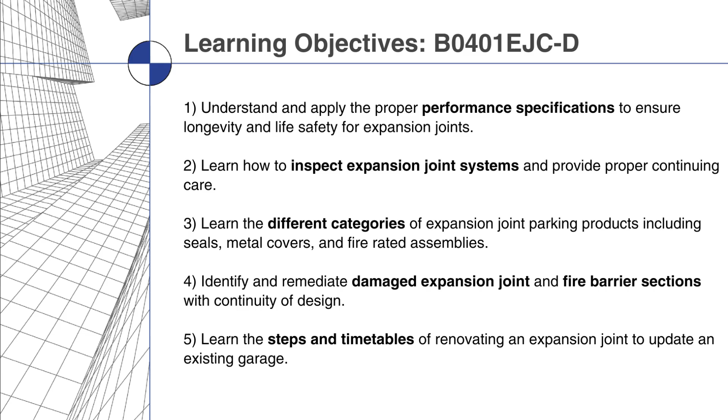This course explains how to understand and apply performance specifications to ensure longevity and life safety. You'll learn how to inspect expansion joint systems, provide continuing care, explore categories of expansion joint parking products, and how to identify and remediate damaged sections while maintaining continuity of design. The course also covers key steps and timetables for renovating expansion joints in existing garages.

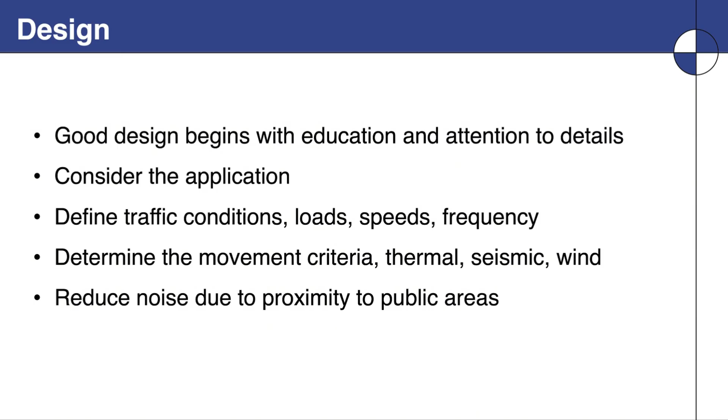Good design begins with education and attention to details. Consider the application, define traffic conditions, loads, speeds, frequency, determine the movement criteria - thermal, seismic, wind - what's going to be affecting the movement of your structure, and reduce noise due to the proximity to public areas like maybe an adjacent apartment building, or maybe there's a roadway nearby where you're doing your design work.

So what should a good expansion joint cover system accomplish in a parking garage? Well, the primary reason they're there is to handle specified movement of the structure. But we also have a lot of things to consider in terms of performance, like load capacity, water integrity, fire protection for any adjacent structures and the structure itself, sound reduction, and smooth traffic crossing.

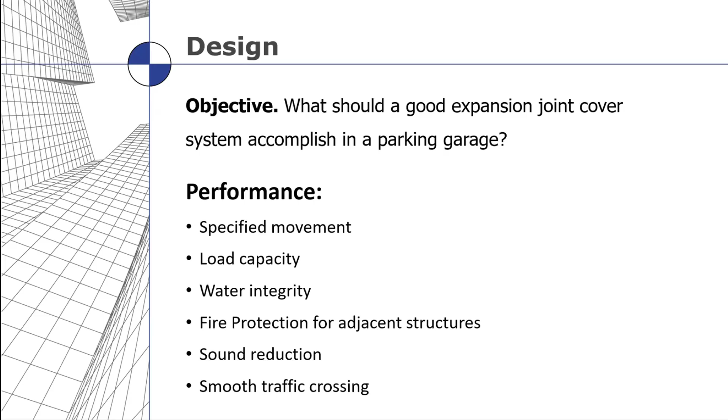One of the ways we take care of this is we consider all these environmental factors. When you're pouring concrete for a parking garage, which is a large construction segment highly affected by temperature change and curing of concrete, it's best to consult with a manufacturing firm and an engineering firm to make sure that the movement related to the structure is also in line with the product chosen that has the right kind of movement for that structure. So you want to make sure the two align.

I'll give you an example of a structure where you really need to pay attention to environmental considerations, and that is this diagram of a Texas wrap. The premise is that there's a parking garage that's basically freestanding, but built all around the perimeter is a series of construction projects related to either commercial or residential, like multifamily or something like that. And they're all connected together.

That red rectangle you see there is the expansion joint cover that happens between the parking garage and the structure. So we want to pay close attention to how we treat that - keep it waterproof, allow it to move, keep the fire where it starts out and don't let it move around and through the structure. We want to make sure we pay attention to all those kinds of things, in addition to all of the harsh elements like rain and sun and all that sort of thing that we contend with in these types of applications.

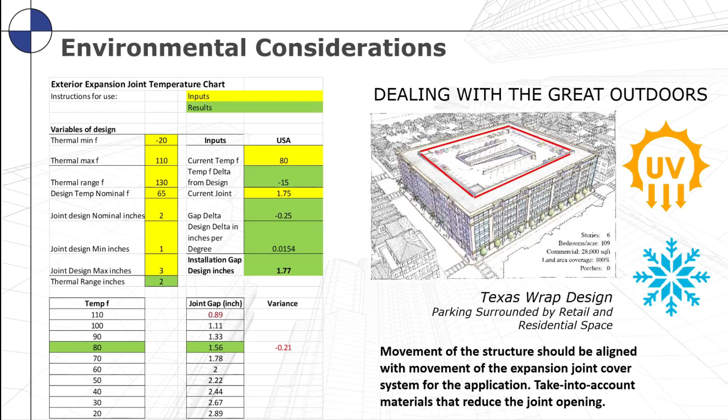Environmental concerns: concrete in winter versus summer. Concrete expands in the summer, which makes the expansion joint gap get smaller, and concrete shrinks in the winter, which makes the joint gap get larger. So the timing of the concrete pour should be coordinated with the joint cover material being applied.

Elastomeric systems allow for a wider percentage of movement due to the smaller joint size. So if you have a small expansion joint opening, the amount of expansion and contraction of concrete has a greater effect, but elastomeric seals are very good about taking up these variables in the width of the joint due to temperature changes.

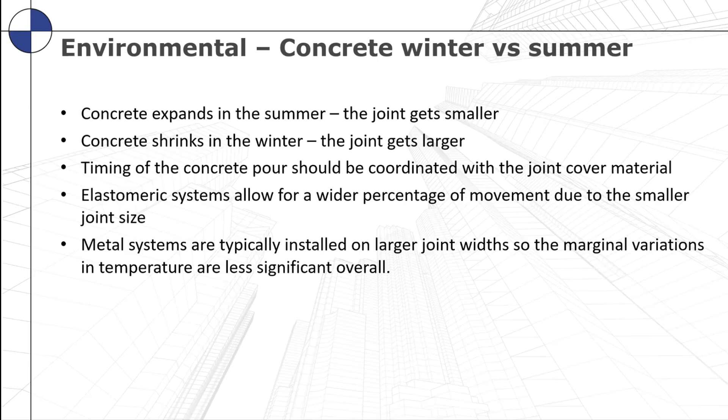Metal systems are typically used in larger expansion joint gaps. Even though there is movement happening in concrete as it grows and shrinks in hot and cold conditions, in larger joint applications that's minimized by the width of the joint being placed. So in both cases, you really have less to worry about than you think when it comes to concrete growth and shrinking due to thermal conditions. We've really taken most of that into account, whether you have an elastomeric system or a metal system in your garage.

For load capacities and those kinds of requirements, it's best practice to state what your load path is for the type of construction going on and what kind of equipment will be crossing through your garage. You may have an industrial complex with pallet jacks going in and out, so you have different types of pallet jack loading. Forklifts are common, class 2 and class 3. Scissor lifts for repair, changing lights, and fixing electrical equipment may also be going through there.

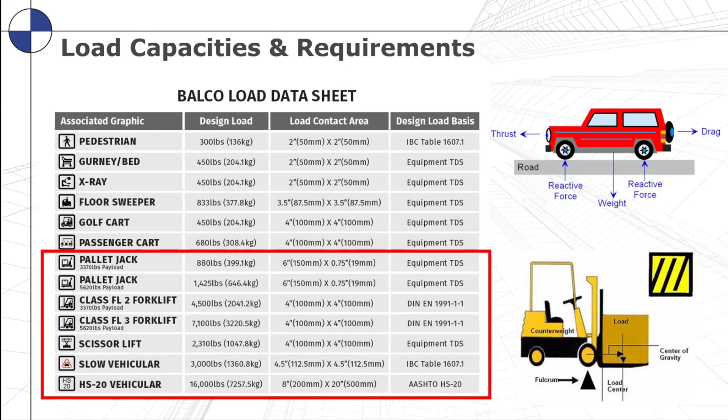Slow vehicular traffic in a parking garage is most common. An HS20 vehicular traffic might apply if, say, you have a parking garage with an entry lane coming through an airport, so there's higher speed traffic coming up to the garage that slows down once it gets into the garage. All of these may factor into the kinds of products you choose, but it's best to know the load area, the length and width of the area, and the amount of loading being applied so we can select proper products.

This particular project is the Jorge Chavez Airport in Lima, Peru. This is a 30-inch wide expansion joint with a 62-inch wide cover plate, so quite a large system. These can be pretty robust, and there are a lot of considerations for movement. This had a 100% maximum open movement and a 90% closed movement, and that's very important.

Why 100% and 90%? Well, the 90% is because there are elements of the construction and expansion joint cover system that go into the throat of the expansion joint gap, taking up some amount of space. So we need to make sure we coordinate. If you want 100% open and 100% closed, you may have to make the joint a little bigger than you thought to make room for things like fire barriers, water barriers, metal framing, and other components that might be inside the joint openings. You may have to upsize the width of the joint to make room for all those internal components.

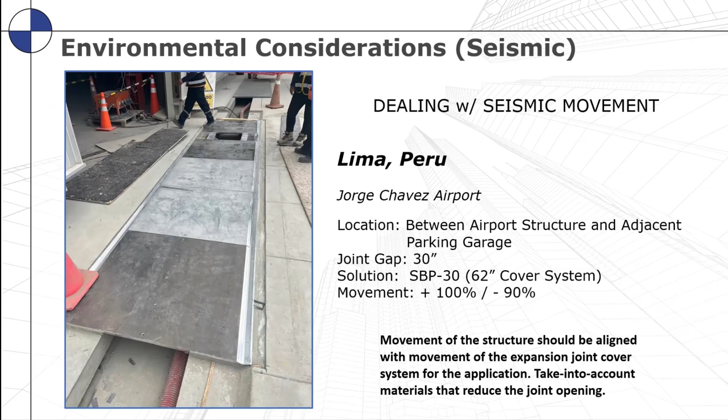Water management is extremely important. In elastomeric systems, they're generally controlled by the seals themselves installed in the structure. In larger systems with metal plates and metal expansion joint cover systems, generally speaking you have a moisture control system, usually a water barrier that could be made of different materials like EPDM or TPO or other flexible materials. But all of those change directions, they move horizontally and vertically, they change directions in the same plane, and you need good instructions on how to make sure all these remain watertight.

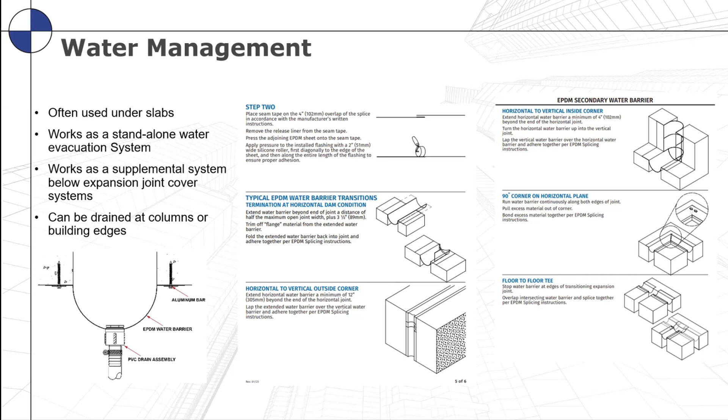You may also wish to have drains placed, so you can control where you want the water to go, instead of it just sloping through the garage. You might want to put a plumbing connection that drops between a column so it's hidden from public view, while controlling the water evacuation and sending it wherever you want, to drains in the basement, or out to planters outside the structure, or whatever mechanism you want to use to evacuate the water.

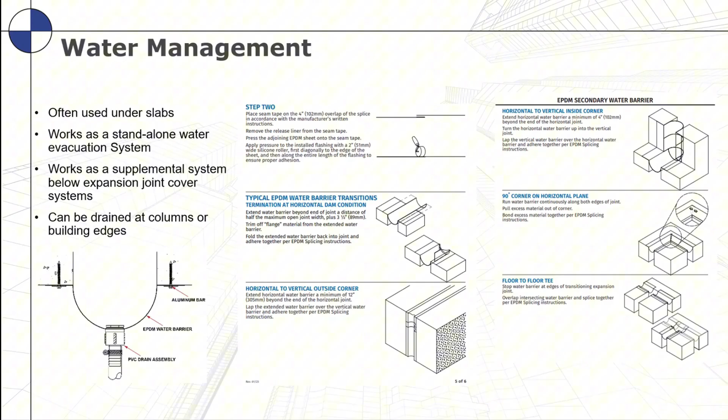Fire ratings: standalone parking garages are currently exempt from fire barrier requirements in the expansion joint application. That's a standalone garage. But other items like fire stop penetrations are now part of the code, and it is currently in code discussions to look at putting fire ratings into the expansion joint applications in garages.

But if a garage is connected to another structure, like a residential structure or a commercial structure, then you're going to have fire barrier requirements where those two meet, where the garage meets the commercial condition. So it's good to be up on the codes and the requirements for expansion joint fire rating.

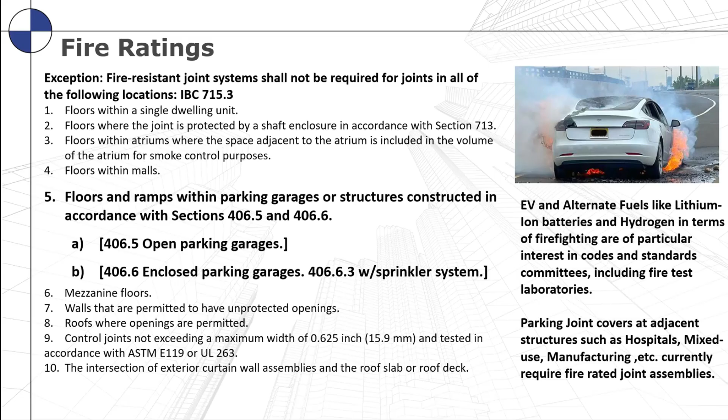One of the discussions taking place now is also EV and alternative fuel, like lithium ion batteries and hydrogen and things of that nature. Those burn differently - they have a faster burn and a hotter burn for a different period of time than most construction materials that have traditionally been placed in buildings. So these discussions are taking place that it may affect the fire rating of those kinds of areas in standalone parking structures, as well as structures that are connected to commercial properties.

When you're looking at fires and the casualties associated with that, generally speaking it's smoke that is the culprit causing the majority of fatalities. There's been a lot of studies done here - this one's done by John Hall Jr. of the NFPA, the National Fire Protection Association.

The short version is that smoke does travel with some speed - about 3 to 5 miles an hour, which is a walking pace to a brisk jogging pace for most people. That's okay if you're outside on a track or inside a gym on a treadmill, but it's not okay if you're with a crowd of people with sight visibility reduced because of the smoke and you're trying to egress folks through a confined area. Then that speed is not practical, and so you have people overcome with smoke.

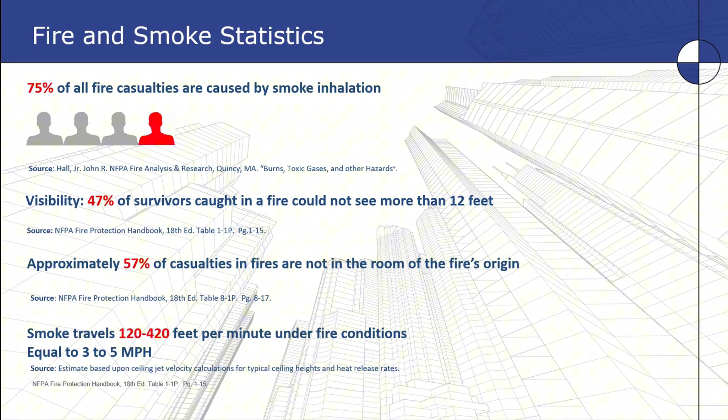So it's best to be able to keep the smoke travel contained in certain areas so that it doesn't spread throughout the structure. Another thing that we want to reduce is sound transfer.

So if you have a parking garage next to an apartment or something like that, no one wants to hear that clank clank when people are driving over a metal cover in the garage, and they hear that in their apartment. So sound dampening is important.

So we want to rely on sound dampening as a part of the structure itself, but it's best practice to make sure that we take care of that sound reduction in the expansion joint covers themselves on the parking garage. And so for that, we use different kinds of measures.

There are two measures that are most frequently used. In a parking garage, the most common is the OITC, which is the outdoor to indoor sound transfer - obviously from an outdoor garage or a drive lane to a building. The whole idea is to reduce the amount of decibels coming from the subject where the noise is to the pedestrians that are hearing this noise.

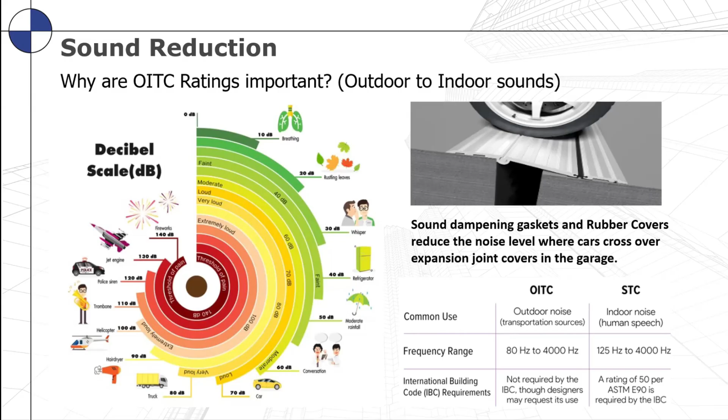And then there's another indoor to indoor noise measure that's not as applicable to parking garages, but it's a sound transmission class. The idea is you want to reduce it down to an acceptable level, so you want to get your ratings.

Let's use STC for an example. You want to be at a minimum of a 50 reduction, which means you would faintly hear sounds. A 60 would be like if there's a loud noise outside, you wouldn't hear it inside, like shouting or hammering. And a 70 reduction, which is extremely high, would mean basically no change from a high level of decibels outside to inside. Most of what we target is going to be in the 50 to 60 range for reduction.

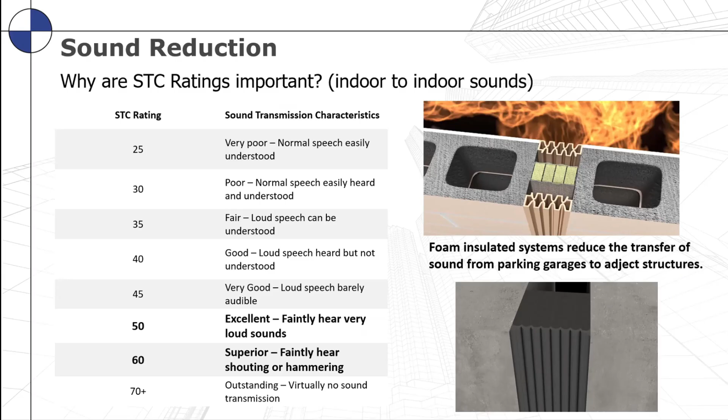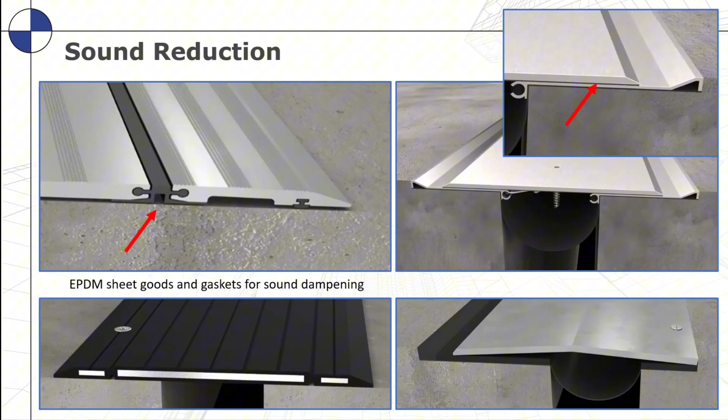You can place your metal cover on top of elastomeric materials like EPDM reinforced rubber, conveyor belt type materials, things of that nature, that you can fasten into place that absorb that sound. And all of these things, being rubber, are pliable, so they also allow for some vertical compression and motion as a result of loads being applied to the parking deck.

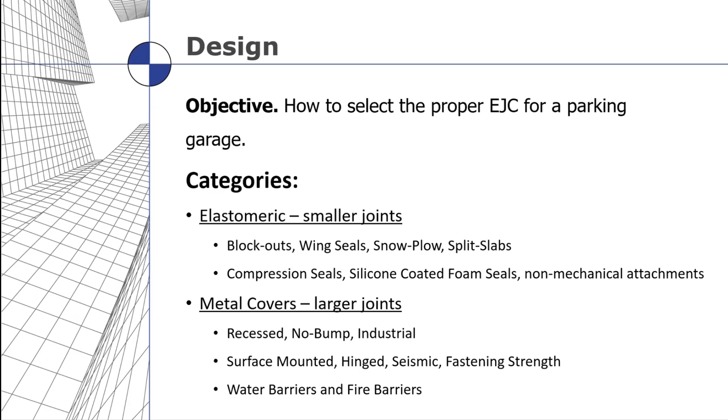As a rule of thumb, elastomeric products are in smaller joints, and metal covers are in larger joints. So how does that look? Well, that line is about the 4-inch line. That's kind of a magic segment that is most common throughout construction. And 4 inches is an area in parking garages where a car tire can span both sides of the gap, completely supported from one side of concrete to the other.

So the rubber is really not holding the car up or anything like that. But when the joint gets larger than that, especially when it moves 50% and the maximum opening is 6, 7, 8 inches, whatever, it gets pretty large. Then you have a much heavier load because the weight of the tire is pressing down with its whole weight on the system, so you need a metal cover plate when you get to that. So the 4 inches is the magic line: pick elastomerics at 4 inches or under, pick metal when you get above 4 inches.

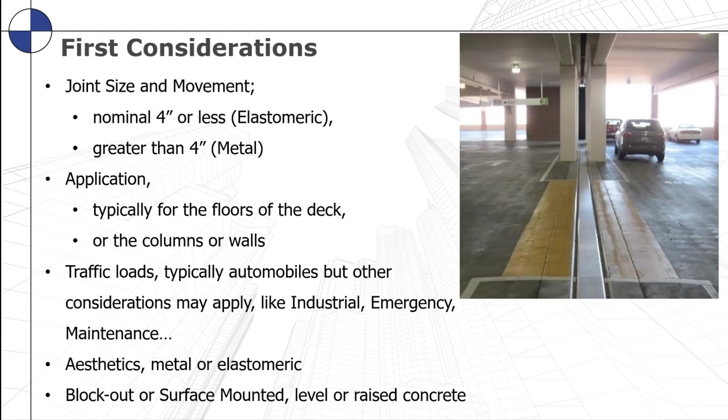So here's some examples of the elastomeric kinds of systems that are most commonly used in parking garages. The top left is what's called a wing seal. You can see those two pictures there. The far left top picture is a wing seal that is a floor-to-floor application, and the one next to it is a wing seal that is in a floor to probably a column or wall application, so there's a 90-degree segment right there.

But these are made to line up with each other so that you continue your waterproofing. You can see there is a rubber gasket there with flanges off to the side - that's why they call it a wing seal, and they call those flanges wings. That's filled with an elastomeric concrete material that absorbs shock and allows you to bond this system to the concrete and allow automobile traffic without any mechanical attachments to the concrete. You don't have to drill any holes or put any fasteners, which is really good for post-tension concrete applications, common in a lot of parking garages.

So it's very attractive to not have to put screws and anchors and drill holes into your concrete. The top right picture is a compression seal, epoxy bonded seal that is installed completely into the opening of the expansion joint gap, so there's no block out and no wings or anything like that. It's just epoxied into place, and the car drives across the top of it, and it's completely sealed. All of these keep the water from working its way through the openings.

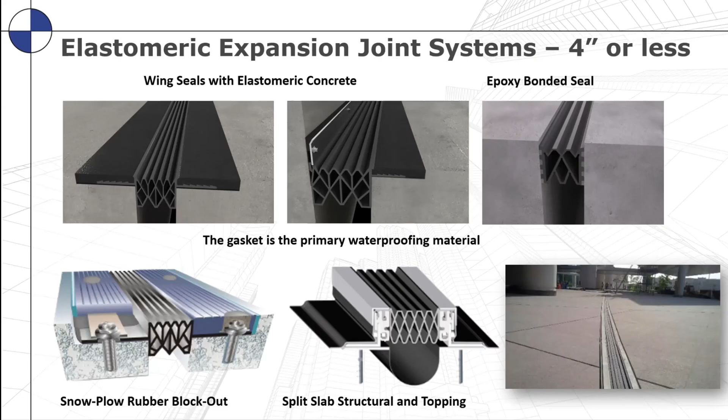And then the bottom right two pictures show where you have a structural slab with a topping slab or pavers on the surface. Those can be variable depths, but they generally consist of a belt and suspenders kind of approach, where you have an elastomeric gutter on the structural level of the concrete, and then at the topping slab level there's a secondary seal that is mudded or heated into the topping slab material for waterproofing. The wing seals are very durable - they handle automobile traffic very well, and these are the most common types of applications we see in parking garages.

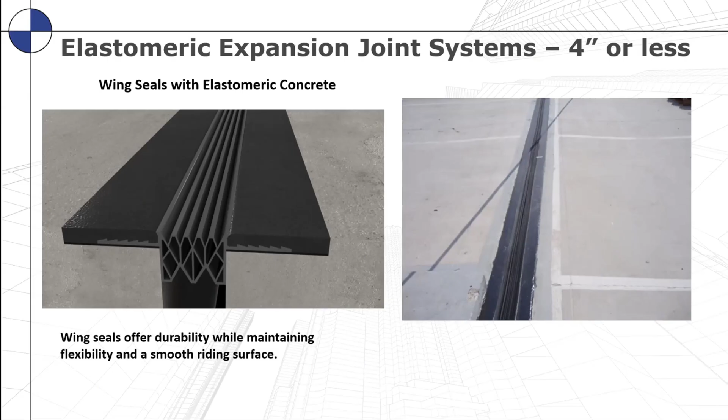Metal systems - it's best if you can recess the product into a blockout. One of the things that we try to do is, if you're going to recess into a blockout, it's best practice to try to keep that as shallow as possible.

So the top left picture and the middle picture there all illustrate a shallow blockout system that is about 3/4 of an inch deep, that allows you to have pretty minimal penetration into the concrete depth, so that when you apply your anchors to hold it in place, it has less of a chance of interfering with any kind of rebar or post-tension cables or things of that nature.

It's still best to X-ray your concrete to make sure that you're avoiding and getting in between those kinds of members so that you stay as far away from them as possible. We try to keep that level as high as possible to keep that interference to a minimum.

In the bottom right are a couple of other examples of different types of systems that are blocked out into the concrete slab that can allow for things like elastomeric concrete to be used as a shock absorbing material on the edges, especially for very, very wide, large joints, and steel plates for very heavy duty applications that would be industrial.

So if you had a parking garage that was in and out of a warehouse, an industrial warehouse, and maybe inside the warehouse has expansion joints, and the parking garage does too, you have a thick, heavy duty steel plate that can take some serious abuse and deflect those pallets and things of that nature off of it so that you don't have damaged materials.

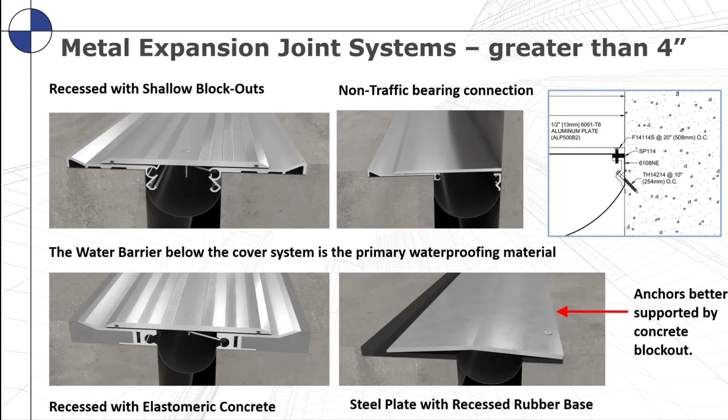One of the most key elements to an expansion joint cover system that is metal is in a parking garage is to have a centering mechanism that has a spring shock absorbing component to it. This particular spring bar system has got a coil spring in it, and there's a cone-shaped piece at the top that allows you to guide your anchoring from the cover plate down into the spring, which gives it an alignment, and pulls it all together.

Then you anchor it down, and that provides tension relief. So when automobiles drive across the cover plate, the anchor, the screw in the center of the plate, gets some relief. As the plate shifts and moves, it has a little bit of relief, so it doesn't stress the head of the screws, which can cause them to snap off.

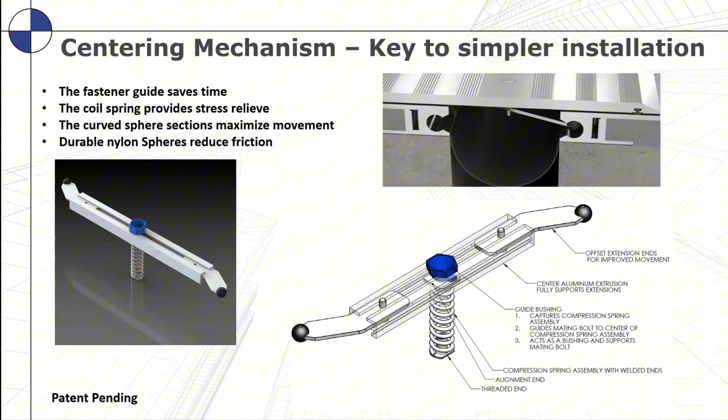If you just anchor a screw tightly to the cover plate, then when a car hits from the side of the cover plate, it can cause damage to that anchor over time. This relieves all that, allowing it to last a very, very long time.

Sometimes you can't block out. Maybe you've got a retrofit application and you've got to install your system on the surface of the concrete in your parking garage.

In that case, it's best if you can keep the bevels on the edges of the concrete to a very low, slight slope. Generally speaking, there are 2-to-1 bevels up to a half inch thick plate, so you can mount that to the surface and create a minimal amount of anchoring. And you have hinges in some of these plates that allow for some really good movement in multiple directions.

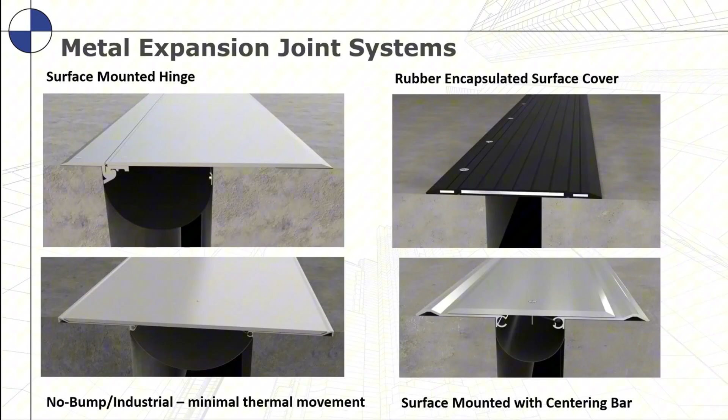In this particular case, you have a sort of live hinge built into the system, so there's more than one component to the surface mounted cover plate. There's a hinge that works if you have that next to a column or a wall or something of that nature.

If those move in shear, not just in normal expansion and contraction, but let's say your building moves side to side, and at the joint it's moving in opposite directions, this allows for the stress relief at that location. Where if you have just a cover plate, or a rubber encapsulated plate, stress can be placed on it when those shear in different directions.

It can actually tear that hinge or stress it or pop the screw heads off or something of that nature when it puts a lot of stress on it. So these hinges really do a good job of allowing for shear motion in your structure.

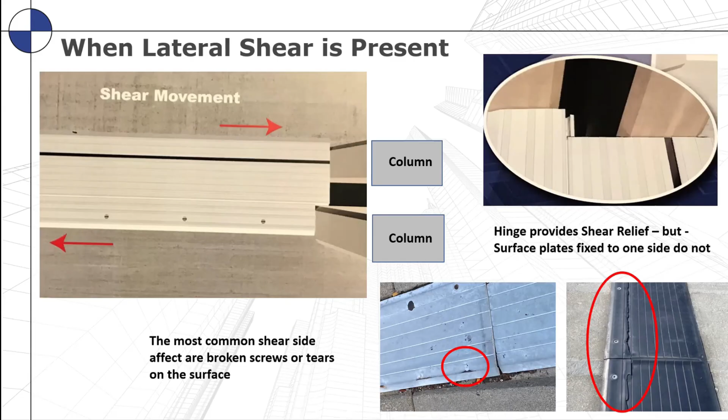Now, inside the parking garages or where they enter into other commercial space, you'll have wall covers, maybe ceiling covers, things of that nature. These can be elastomeric, or they can be metal. They can be a lot of different types of things.

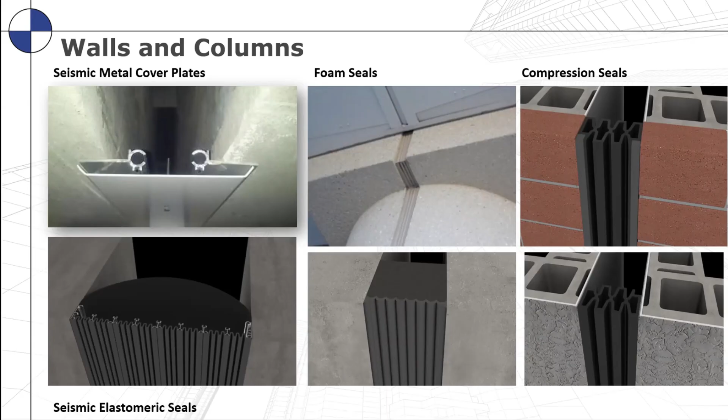Generally speaking, they don't have to do a lot of water control, but they can be provided with water control so that you can move water, from maybe it comes from a roof line, and you trap it inside the expansion joint opening and funnel it down to a gutter system that you can then control to a drain or control to the outside of the structure.

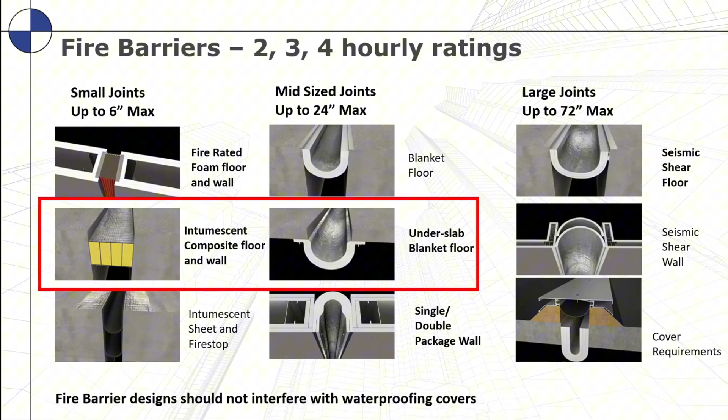When you do have to fire rate a parking garage expansion joint cover system, we try to make sure that we keep the fire barrier from interfering with the joint cover system. So the important piece of that is you do not want anything interfering with the waterproofing layer. Generally speaking, the waterproofing of an expansion joint cover system is going to be at the top level of the floor, whether that's the roof level or any other level.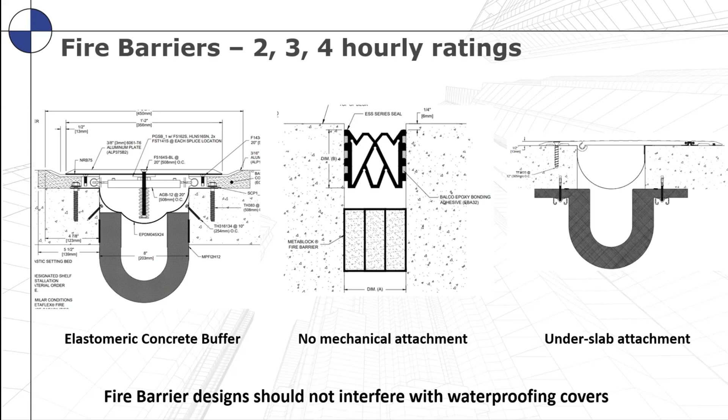We move the fire barriers to be down below it. If it's an elastomeric seal, we have fire barriers that are friction held into place, or maybe they're held with glue or epoxy, so there's no mechanical attachment and no interference of the fire barrier with the seal. And if you have a metal expansion joint cover system, you can install those from underneath the slab, if there's a listed tested design for that, so that you keep completely separated the waterproofing layer from the fireproofing layer, so you have no chance of interfering with the waterproofing.

So, maintenance. Good maintenance begins with training and periodic inspections of the joint covers. You want to look at them from above and below—stand on top of the joint cover and look for things, and get below it and look for things.

You're looking for things like broken fasteners, loose plates, leaks that you might be seeing coming through the system. That would be looking from below. Check the surrounding construction for cracks—do you have major cracking going on at the expansion joint location in your concrete?

Torn or distressed seals and gaskets. Bowed cover plates—are your cover plates dished in so that you can tell cars driving over it are bending the plate, meaning you may have a plate that's undersized for the load action going on there. Maybe you intended an automobile to be driving across it, but now you've got fire trucks or ambulances, heavier and higher PSI tire loads, or maybe they're using pallet jacks or forklifts in an area designed for automobiles, and you're having failures of that cover plate. It's good to identify those kinds of things in routine inspections.

And large separation between butted plates. If your plates are spaced apart from each other with no splice control system keeping the plates aligned, and they scoot far apart because cars are turning and changing directions on the plates, you could have a safety concern where if it gets wide enough, a person can step their foot into the gap between two plates. So you want to make sure those plates are properly connected at the splice points, and check any kind of visibility you can see from the decks below you.

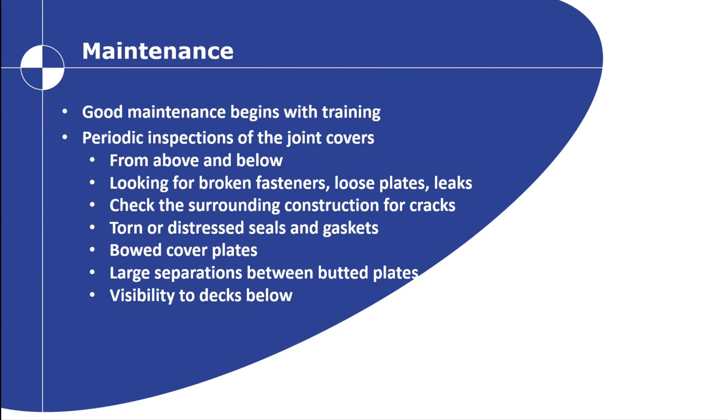So how do we conduct these kinds of trainings? One, we conduct training for contractors and subcontractors, and one way we do that is to make sure we have a good comprehensive program in place. We use associations, like in this case the Sealant Waterproofing Restoration Institute validated training programs. As manufacturers, we go through a series of trainings so we can get certified to deliver these kinds of trainings with a validated certificate from these groups.

They look at an overview of the expansion joint applications. They look at safety—it's a very big piece of what we do, safety in installation and safety afterwards. Material science—how are these things made, how do we know they're compatible with your deck and your deck coating and whatever else. We do lots of demonstrations, plans and specifications to make sure we have the planning in place to get this done properly, specified properly up front. The plans, the shop drawings, and all those sort of things line up so we have a good finished product and a good plan in place.

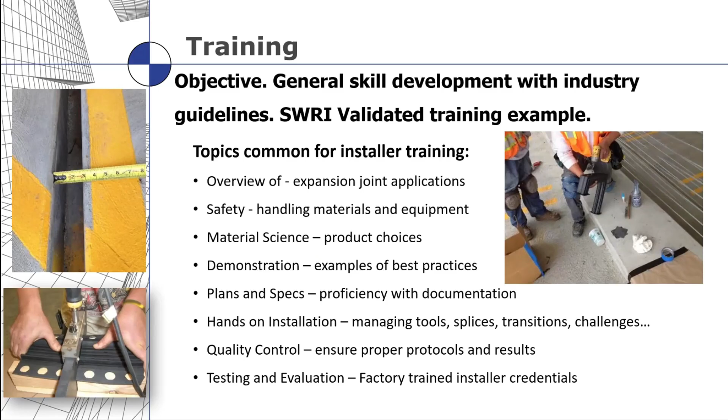There's a lot of hands-on installation, so a lot of mock-ups—sometimes field mock-ups, sometimes factory mock-ups—to make sure the installers know how to handle these materials. Quality control to make sure your end result is correct, and then testing and evaluation for factory training. Some of the steps we use to make sure we have a properly installed expansion joint at the end of these is site meetings—lots of site meetings.

So there's a lot of mobilization discussions, a lot of concrete pour discussions to determine what the block out width and depth need to be, what kind of materials are going to be in place, where you're going to store these materials indoors or outdoors, all those things. Field measuring is very important to make sure that you measure before you order materials so that you have what you need when you get out there for your installation.

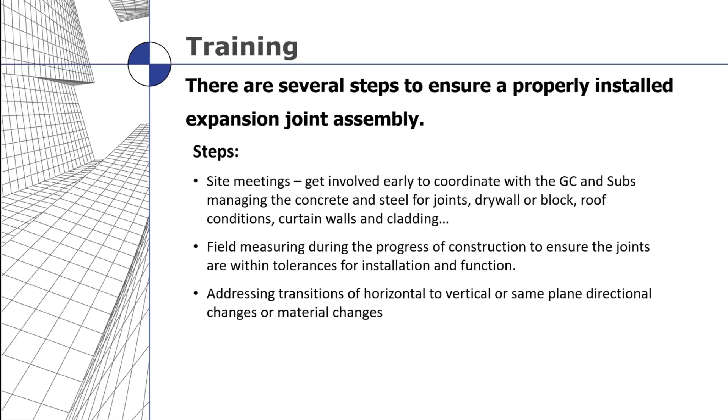And then addressing all the directional changes that happen in there. It's very easy sometimes to put in the straight lengths, and then you come to the corners and you're trying to figure out, well, how do I actually make this work? Do we actually have proper instruction? So materials and methods in terms of installation, lots of training to make sure that we know how to install these materials and make these transitions and changes, and to keep your concrete surface clean.

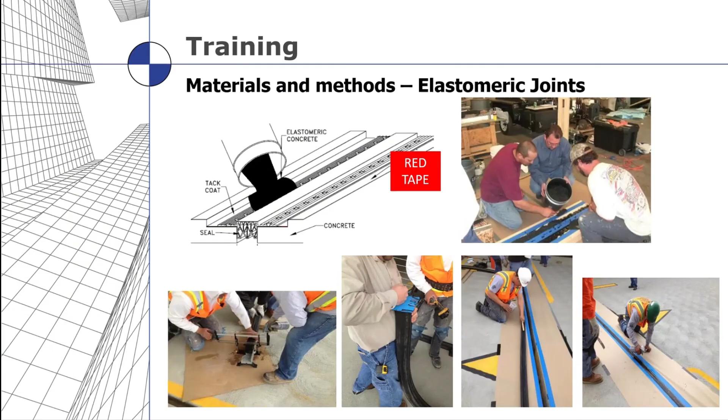So when we do the installation, when we peel away all of the preparation materials that have been used to protect that joint, you have a nice, clean, finished installation at the end of it. So you don't have materials like elastomeric concrete or epoxy or things like that on your deck that are making it look unsightly. When you have material directional changes, they can be done in the factory, or they can be done in the field.

And then in these split slab kind of applications where you have a structural base slab and then you've got members on the surface like tile or terrazzo or concrete or whatever type of upper surface you've got, then it's best to finish up to it as close as you can, do your installation, and then do your finish cuts to finalize your installation.

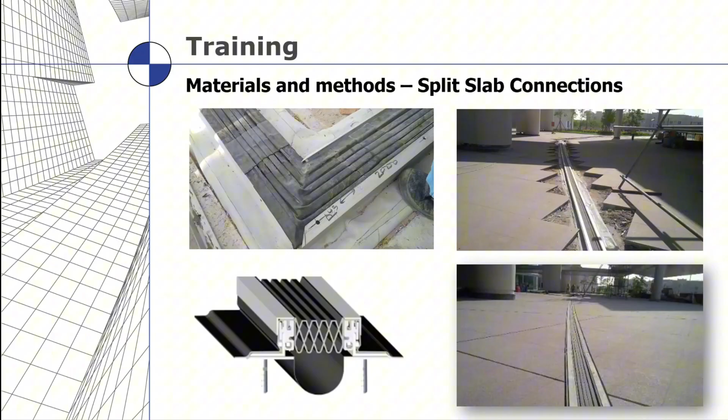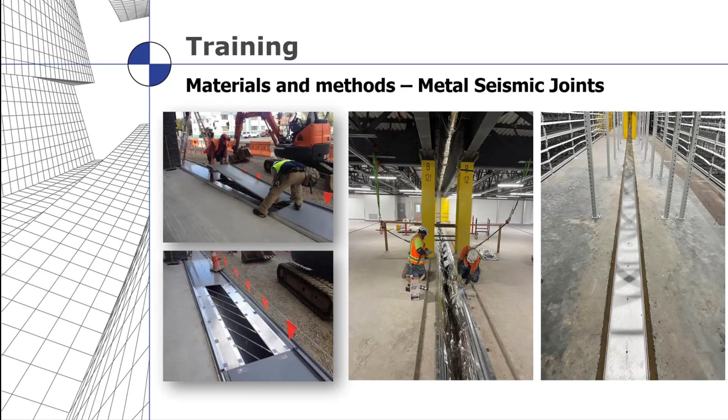And there's also other mechanisms in place where you need to put things like cradles of material or straps to make sure that your materials and your tools don't fall through those gap openings. Because once those gaps get large, there's a lot of safety we need to take into consideration when we're installing these. We want to make sure that the weights of the materials are capable for two people to lift properly and install. And if they're not, then we need to make sure that we have equipment in place that can lower and lift and handle that weight and be maneuvered by the installers.

When you deal with fire barriers in the smaller gap openings, when you get to that 4-inch and less, most of the time you're not having to mechanically attach anything to the structure. You can just simply friction fit or put it in with an epoxy or a glue or whatever the manufacturer requires in that particular application. And when they get larger, they're generally made of different materials.

They're generally made of insulative blankets and some metal foil or things of that nature, and those require some splices in the field. So you just need to follow the manufacturer's instructions. It's best if you have splices that do not require a lot of field modification. If the splice is made from the factory, just nest together properly, and they're very, very simply put in place, that keeps it very simple for the folks in the field, which ensures that you have a good, proper installation. So you may have just a simple nesting fit and a piece of sheet metal over the top of it that seals it all up, and it's very, very easy to install and ensure that you have a good transition.

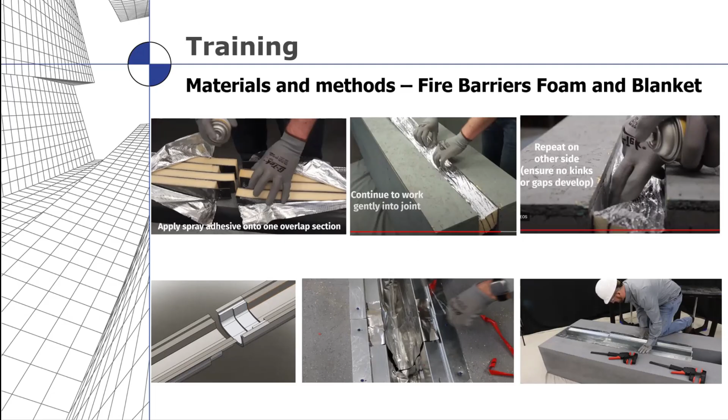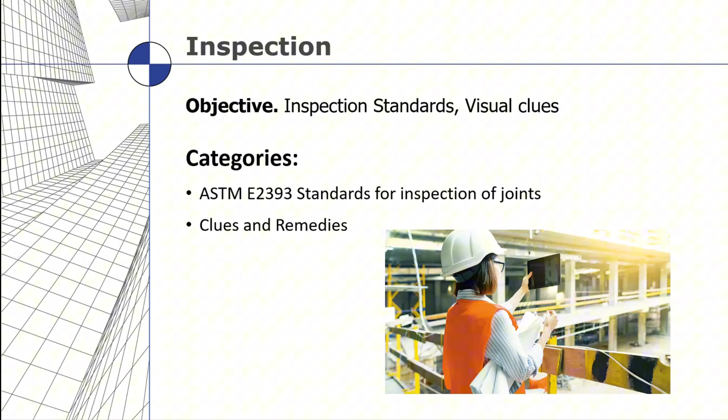So when we come to inspection, we want to look for all the different things in an expansion joint that could cause problems. Typically parking garage engineers have got a lot of criteria that they use to inspect by, but the most common standard used to inspect expansion joint applications is the ASTM E2393. That one is required as a special inspection for risk category 3 and 4 buildings, which would be high occupancy, high importance, different kinds of things. Other than individual engineering firms creating their own criteria, this is the most universal criteria used to inspect an expansion joint application. And in this particular case, the NFPA, the IBC, and the IFC all point to the exact same method for inspecting expansion joint covers, and that is the ASTM E2393.

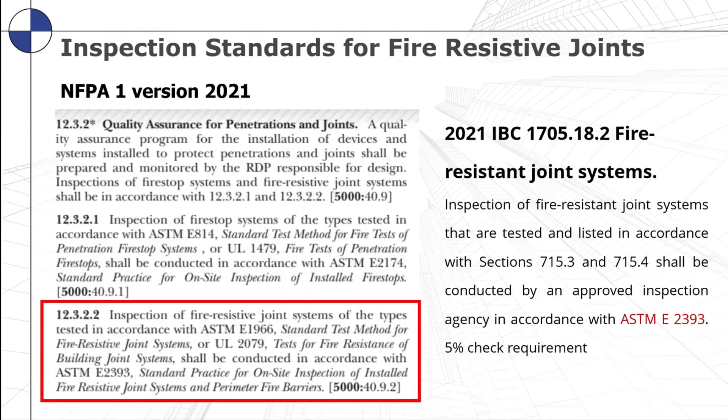All of the building codes reference this same standard as the go-to method for expansion joints, especially in fire-rated applications. When you're looking at the systems themselves, you're looking for all types of things.

If you're looking at an elastomeric system, then you're looking for anything that would be out of the ordinary in terms of the look from the surface of the joint.

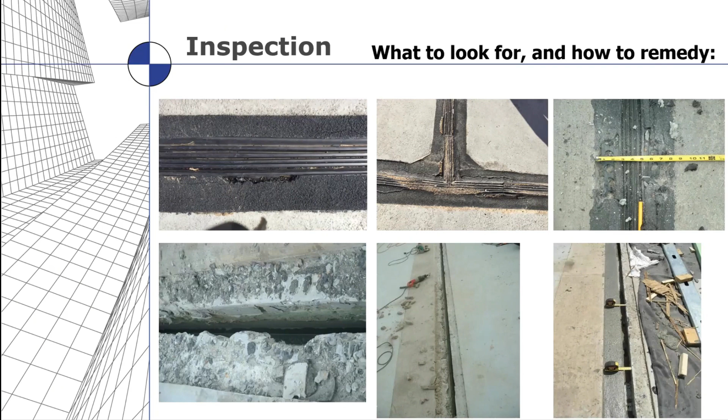Visible signs on the surface generally mean that there are some deeper issues down below. The remedy to that is to grind that down, clean that up, shore it, repair it with some type of structural concrete repair material, get the blockouts back to clean and level and the depth that they're supposed to be, and then you can go back in and reinstall your elastomeric sealants or seals for a good installation.

Generally speaking, there are maintenance manuals that come along with any expansion joint cover manufacturer's product. When they ship it out to you in the field, they tell you in a maintenance manual as part of your closeout documents that your elastomeric seals, for instance, you can wipe these seals clean with an organic solvent - benzyl, propanol, alcohol, lots of different kinds of materials can be used. Aluminum, same thing - there are cleaning instructions, mild soap, solvents, things of that nature that are used to keep these things clean and in good shape.

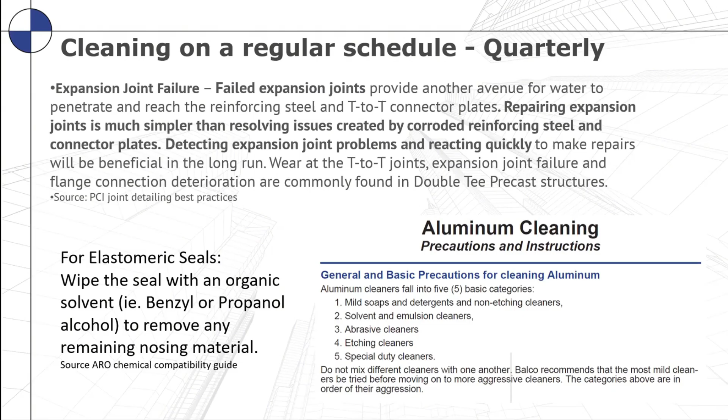But you always want to inspect the entirety of the system as much as possible without doing too much destructive testing. And so restoration is our final segment.

When you remediate a damaged expansion joint, you have to assess it, then you got to remove it, and then you got to replace it, right? That sounds pretty simple, but that's where all the work's at. So take a good look at it and study it deeply first. Then you take it out, then you replace it. In that removal and replacement method is where you're repairing a lot of concrete and things of that nature.

If you're doing a renovation where you're taking out a system that was already functioning, but you're renovating and repairing a new garage, you just need to make sure that you've got proper specifications in place for the product that you're selecting, and you account for any kind of lead times for both the removing of the materials and for the installation of the materials and whatever downtime you have in your garage.

Parking garages are revenue generating areas, so make sure you know exactly how long you're going to be down, and if you can do work at night or weekends or whatever that is to make sure that your revenue is the least impacted as possible.

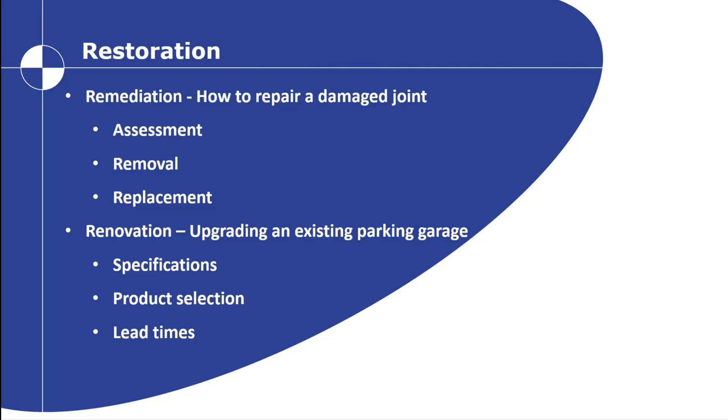So how do we correct these issues in the field when we're doing this kind of remediation work? Removal, replacement, and follow up, right? A lot of times you have to cut out the old material - you're cutting out elastomeric concrete, or you're cutting out a metal expansion joint cover system. You could be grinding off screws, prying up plates and things of that nature.

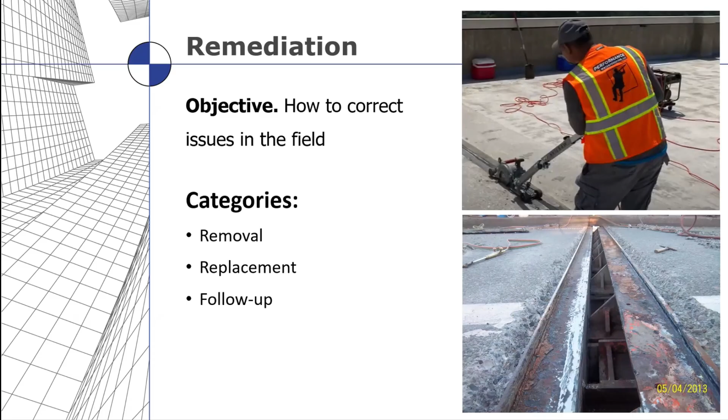One of the things you can do to really help your garage in this remediation process is before you start cutting and tearing out all those things, go underneath the expansion joint locations on your second, third, fourth, whatever levels, and you can install a gutter from below the surface of the joint. Just put an elastomeric gutter, or you could put a metal gutter, but an elastomeric gutter is going to be long and continuous and waterproof, or at least watertight. You can run that all the way underneath the whole length of your expansion joint cover system that you're going to be remediating from above, so that you can control any debris and water falling down into the joint. And you could place drains in there so that you can make that water go where you want it to go.

So you might be sandblasting or doing other removal and remediation work up top. It's very good for you to have that barrier. It's a very inexpensive, simple way to keep any debris or anything from work above from getting down below.

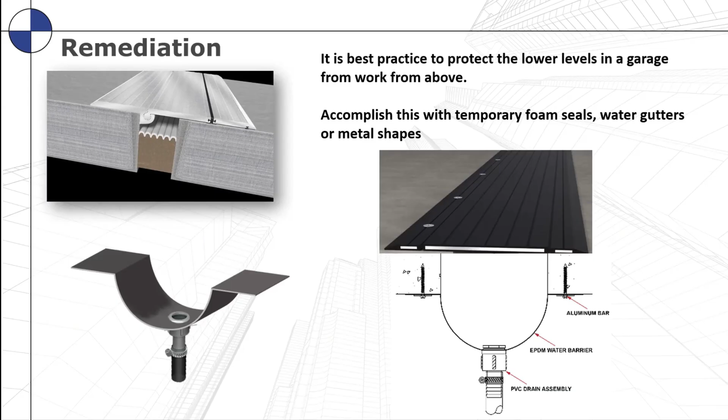This is an example of a project in Australia. It's a Coles warehouse, a big box store there. In their expansion joint plan, they had welded a big piece of steel to a steel slab edge angle and used that for their expansion joint cover. Their forklifts were driving around pushing pallets, and they would catch the edge of that steel. It flipped over two of their forklifts and injured their workers pretty badly.

So they contacted us and said they would really like a solution that's flush and smooth. In this process, we went in, did some demo removal of some segments, then cut out the blockouts. We repaired it with a structural repair material so that it's good and sound, and then replaced it with a very sound expansion joint cover system that was flush to the surface. They had a nice clean result that they could drive forklifts and pallets over, without worrying about bumps or catching metal plates.

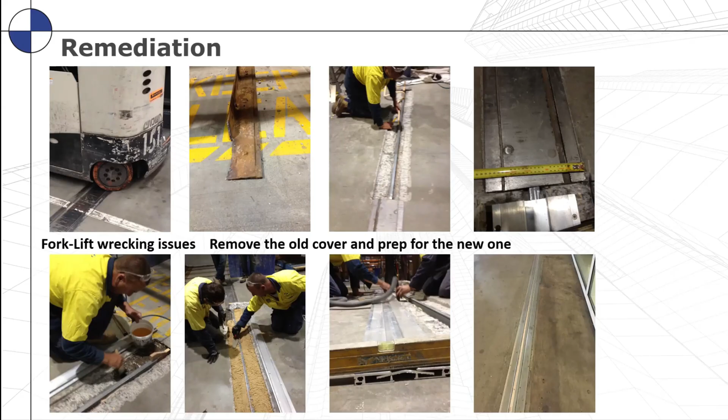It's just part of it. Just assess the situation, look at what it takes to remedy it, and then find a solution you're willing to work with. Make sure you have proper specifications in place.

Generally speaking, the parking garage section of the master CSI specification is 079513, subcategory 19, which is specifically rated for parking garage. That's the specification section you want to look for with a manufacturer. Warranties are most of the time 5 years or more in these kinds of applications because of the waterproofing components and the heavy abuse from automobile traffic and things of that nature.

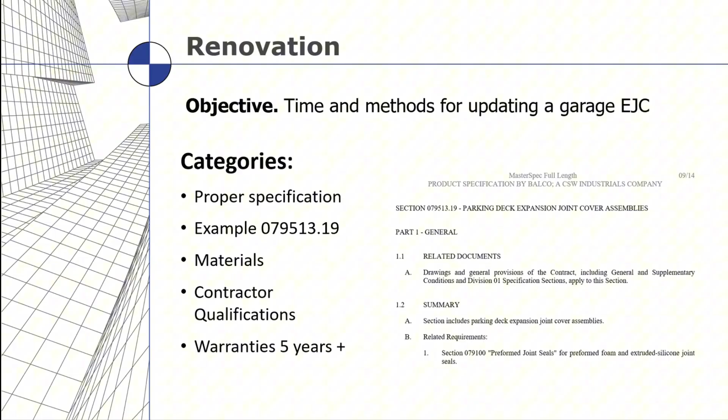Blockout repairs are very, very important. Make sure that you get all that done properly in the remediation process. Again, when you remove an elastomeric seal, look at the concrete down below it and make sure you get it repaired properly. That's a good view of all that. Make sure you have good sharp 90-degree corners and level blockouts.

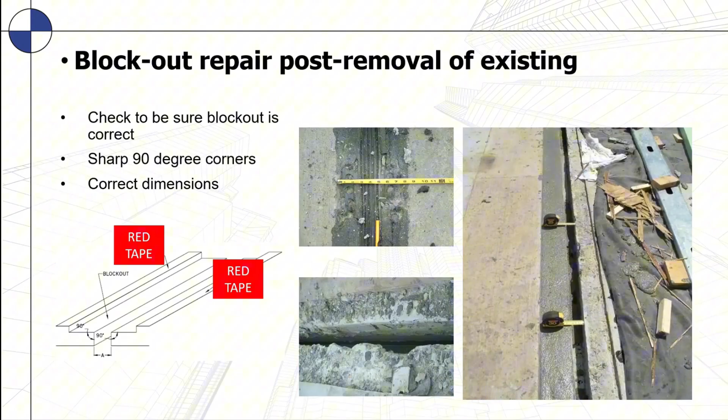When you get ready to reinstall, if you have a situation like this—a top deck of a parking garage in Wichita, Kansas, called Super Car Guys at the time—it has a Z-shaped blockout in it, and the wing seal is being placed in there. Factory-designed miters are placed in there, or you can actually do these in the field if you want to. Either method works just fine, but you have to make sure you have proper instruction from the manufacturer.

You can see there's a 90-degree turn, and the seal that is bonded together there looks like not 90 degrees. There's a reason for that: this seal in its relaxed state is wider than it is when you install it. The factory takes that into account, so when you bend it into a 90-degree shape, you're at the right width of the joint. Those kinds of things are taken into account by the factory to help prepare for the installation.